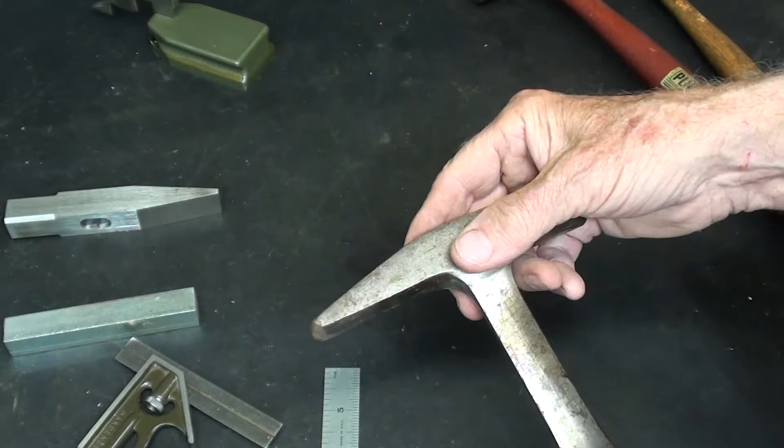I'm getting the drawing. Well, these are the only examples that I have to show you, but here we have a Stanley. Sometimes it's called a cross-peen hammer, sometimes a machinist hammer, sometimes a riveting hammer. Here's a similar one, a Plumb. Never been used. And here's an Estwing, but this is a sheet metal setting hammer. And I've talked about that before, for setting a wired edge or something of that nature.

Alright, this is a General Metals book by John L. Feirer, and he wrote many industrial arts books, metals and woods. But in here there is a blueprint for, and he calls it a riveting hammer. Well, I've given John the credit for this, and I don't think this is breaking a copyright law. But notice that this is made from 5/8 stock. Now I want to make it out of 3/4, which is what we use at the high school.

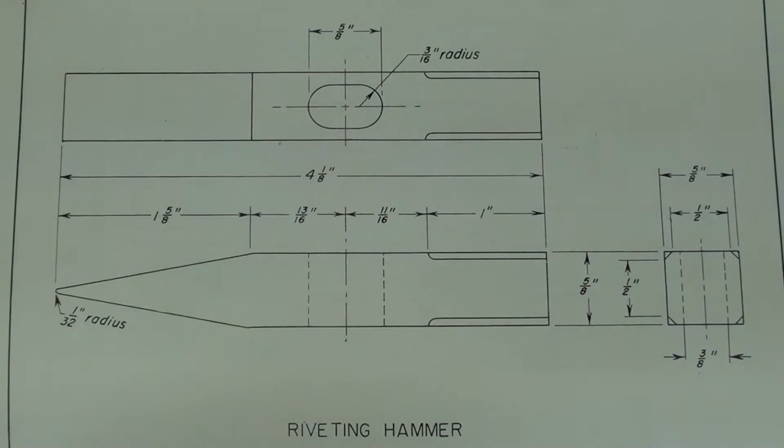So in order to do this, now this is totally against the rules and the law, but I put it in the Xerox machine, which is actually a copying machine, and by trial and error I figured out that it has to be 123% of this size in order to equal a 3/4 inch. So that's done. And this is the picture after I butchered it and changed or added a few dimensions, correcting them to what would apply to the 3/4 inch.

And I'm not going to show all of this layout. Maybe I'll go through it real fast and put it at the end, because the purpose of this video is not to show you how to do a layout, but how to use the shaper.

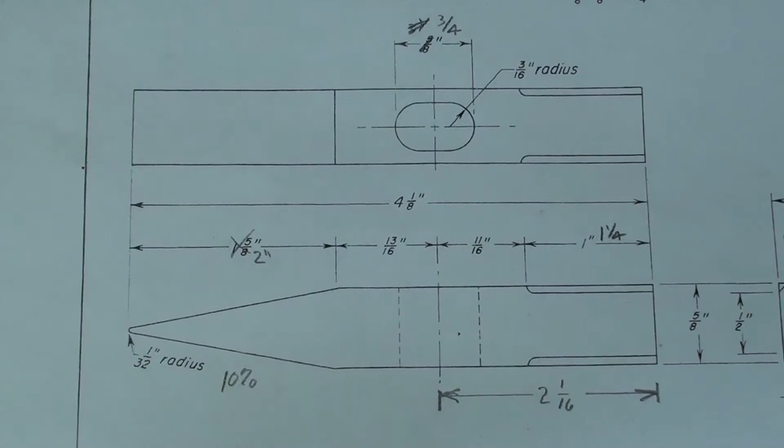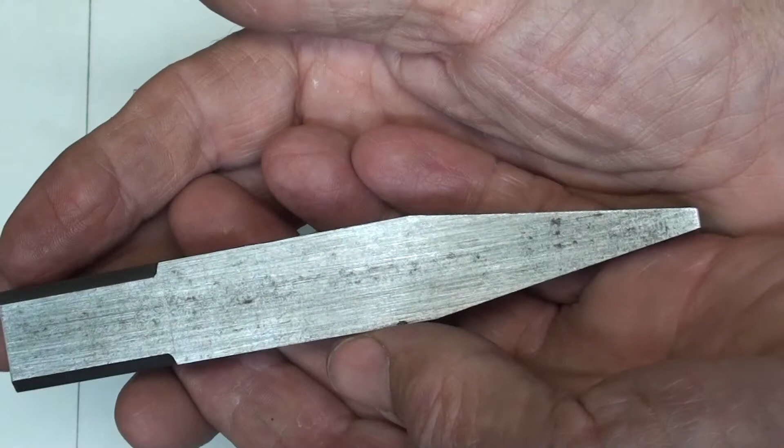But notice on the finished sample that I made, we got some beveled corners or chamfered corners. We've got a slot. Now that I will do on the milling machine. Matter of fact, all of this could be done on the vertical mill in 10% of the time, and then tapering this off. So that's a shaper project, and this is a shaper project. I should get that out of the way. And the contrast is different, but that's what it looks like.

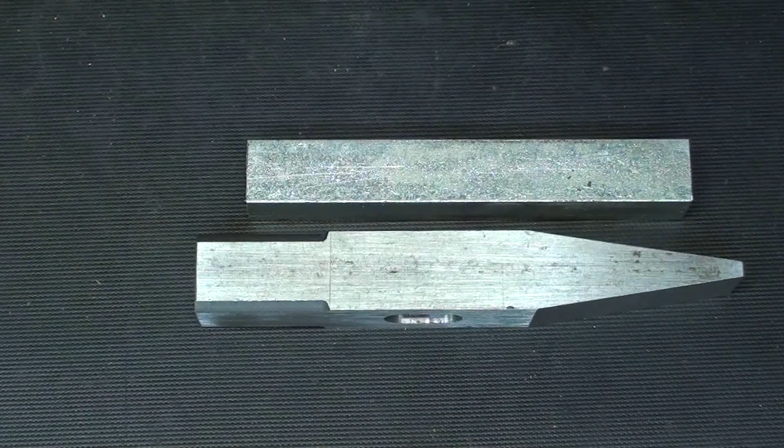So I've already been through this once in my, shall I call it, rehearsal. Let me also say that in my machine shop class we made this out of tool steel, and then we hardened it and we surface ground it, etc., and took it to a totally different level than what I'm going to do here. This is cold finished steel. This is actually a useless project, but many shop projects are meant to learn certain operations. We don't really care about the end product. I'll throw this away.

Alrighty, the layout is done, and that's shown, as I told you, at the end of the video if you want to see it. And it's ready to go, and the first thing I will do is to mill, or should I say shape, these bevels up to that line. So that's 4 setups and 4 cuts. And I will cut that all in one pass. Not too concerned about the surface finish.

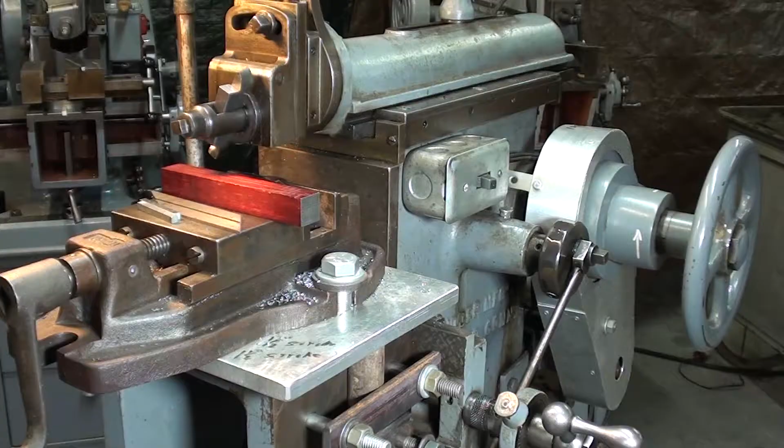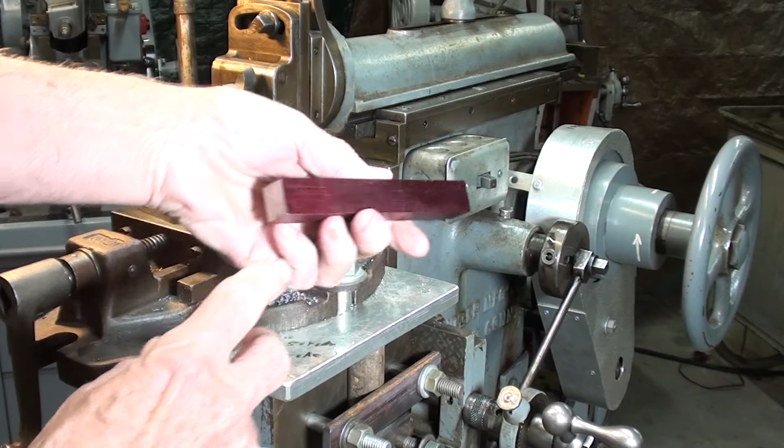Okay, I'm in the shop with the Rowe shaper, and let's talk about the setup. Now some of this I have done ahead of time because you have seen me do it or talk about it in previous videos. For instance, I have already set the stroke length so that it's really only about a 1/2 inch stroke, maybe a little more. And the speed, I'm not sure how many strokes per minute, but it is the maximum. And I have set the strokes so that it will be located right across the bevels. So let's talk about how to set this up in the vise.

Well, this is how I want to set it up. This, of course, is the finished one. That's the new one that I'm actually going to machine. I just have it in here so you can see what I'm doing. Notice that it's on a parallel. Now, I looked and looked through all of my drawers, and I thought that I could hold this with a V-block of some type so that it is held at a 45-degree angle in this position. But I could not find one, so here's what I came up with in the way of a setup. Let me take this out.

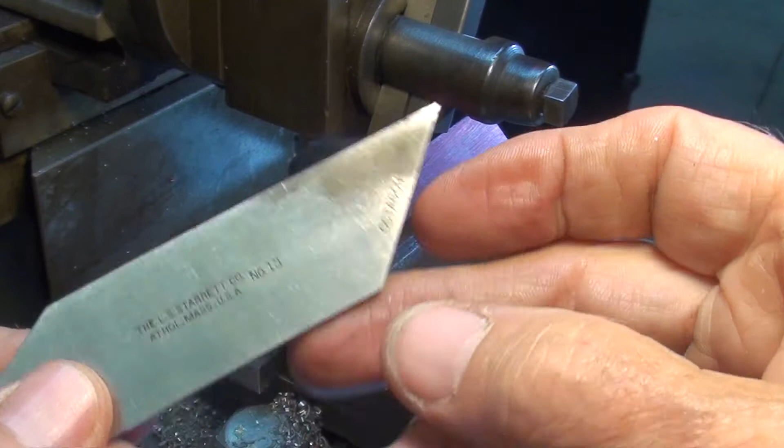There are probably all kinds of ways of doing this, but this is a Starrett square blade, and it says hexagon on one side and octagon on the other side. But anyway, the octagon side is 45 degrees, so that's how I'm going to make sure that I have it in there at a true 45, not like this or not like that.

So the whole idea here, if I can get that parallel under there, and the vise is just barely snugged, and I'm using a couple of parallels here, which really are just pieces of key stock that bring it up to the right height. And I will check here to see that is 45 degrees, and possibly loosen the vise just a little bit to bring it into compliance, and then tighten it down. And I will have to do that 4 times because I'm going to make 4 bevels, 1 on each corner, up to that line. Clear as mud at all?

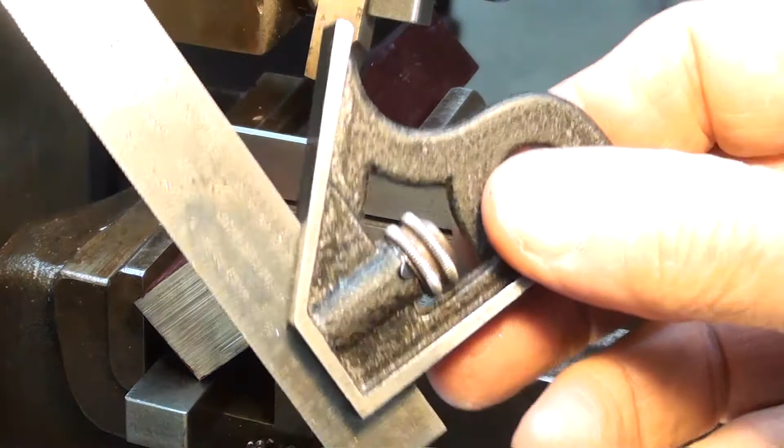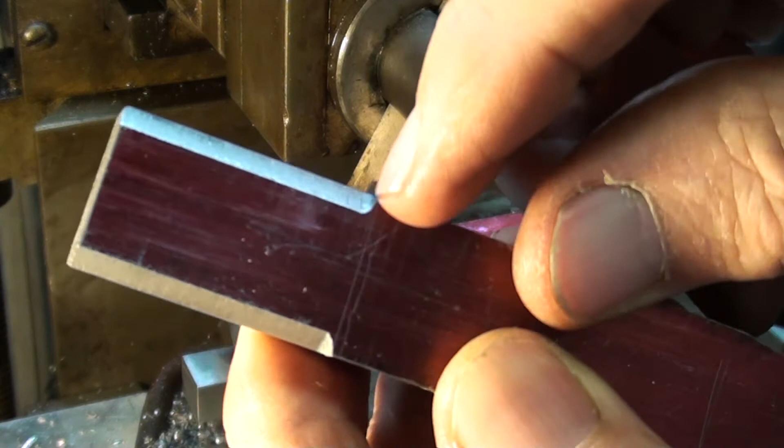Now, I suppose you can use a little square head or something similar to make the setup. Use your originality and creativity. Next, let's take a look at the tool. Now, I set that tool, which I've been using, it's a round nose, nothing special. But at the angle that I've got that set at, and I don't know what it is, it's going to give me pretty much the final angle here, and it doesn't matter what it is. I think that's a pretty good looking angle.

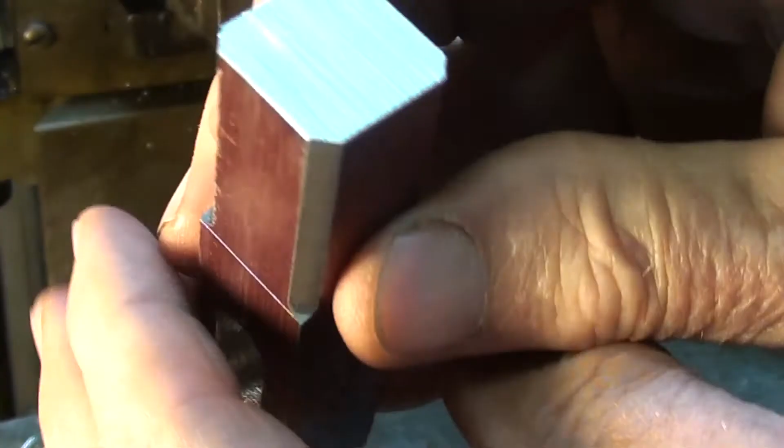Now, I want to set the depth, because this flat should be about 1/8 inch wide, but it doesn't really matter because it's just for appearance. But we want all 4 to look exactly alike. So I'm going to touch off, and I have already determined that it will be about 70 thousandths deep to give me that width. Make any sense?

I am often using the hand wheel here to move the machine back and forth, the tool back and forth. You won't see my hand doing that, but certainly do not turn the machine on until you are sure that it will not crash or damage the machine or the work or anything like that, and make sure the work is tight and cannot move. I've already done that. I'm feeding the tool down as I move the tool back and forth until I just touch. Putting a piece of paper in there wouldn't be that useful. Okay, I am touching.

Now I'll move the tool out of the way. I'm cranking the cross rail crank so that if I turn it on now, nothing will happen. I have zeroed out the collar up here, the graduated collar, and I'm going to feed down 70 thousandths. Actually, I'm on 10, so I'm going to crank in to 80. All right, that means I have moved it down 70 thousandths.

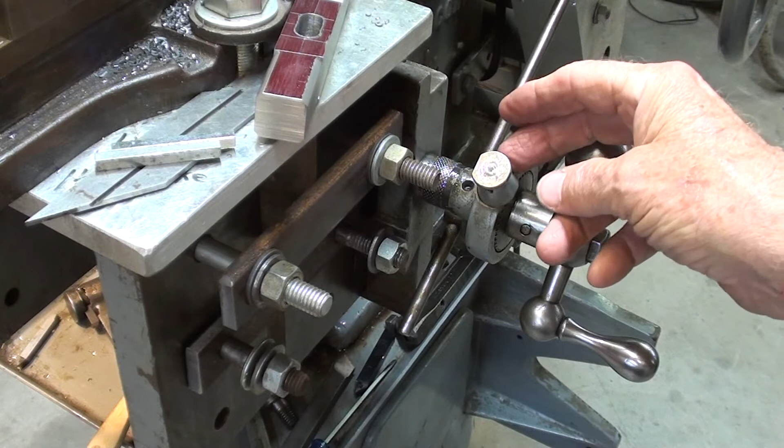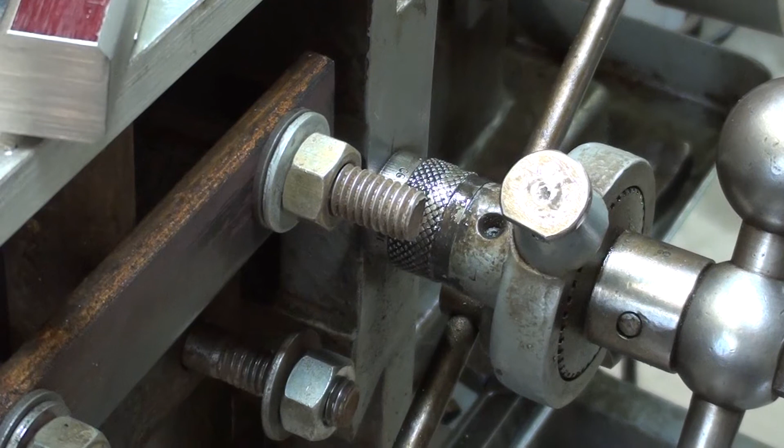Once the tool is engaged and starting to cut, I'll be cranking in here, then I will put it on automatic feed with the flat spot down like that, and that will be a feed of about 4 or 5 thousandths per stroke. This machine is kind of noisy. I'm not sure you're going to be able to hear me as I feed, and the cutting tool comes down to the layout line here, that's when I will disengage the feed, turn the machine off, back it up, and rotate the work, and I'll be doing that 4 times. Let's turn it on and see what it looks like.

And you can see that I came right up to the line, and that gives me a nice termination there, that angle. All right, now I will take it out, rotate it 90 degrees, and do it again. And that didn't take very long. The finish is just okay. It's not great, but it's good enough.

I know I didn't use oil, but let me mention something about safety. Make sure you got your glasses on, and do not stick your finger or any other tool in there to remove chips. Be sure and use a brush. You can't miss with the brush. And you can sacrifice the brush if it gets caught. But don't get your fingers in there. And again, let me repeat, turn the machine over by hand with a hand wheel to make sure that it will not crash.

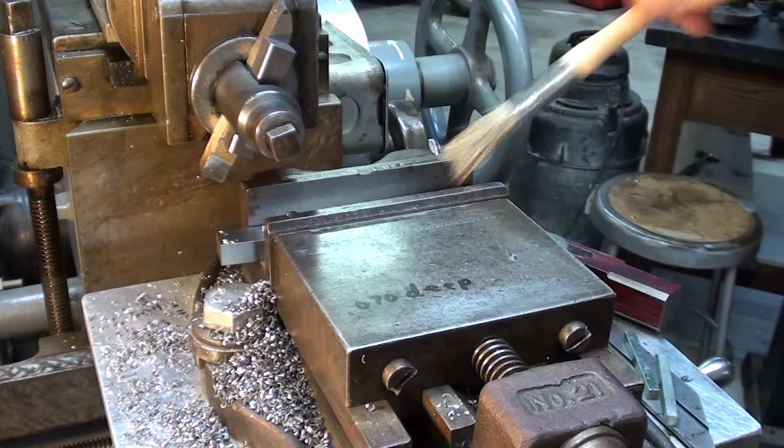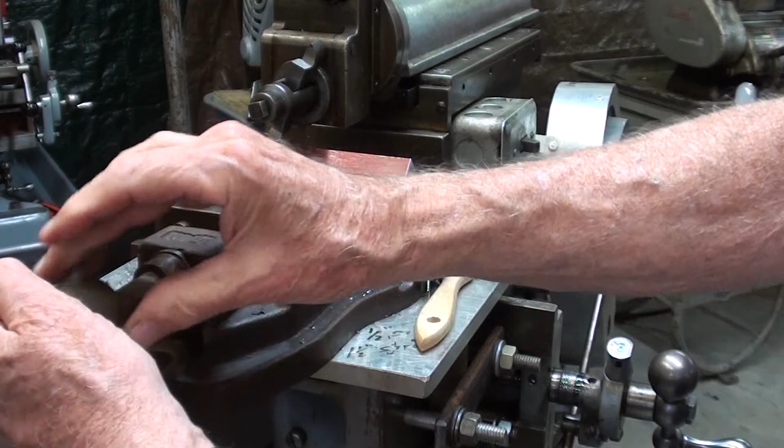And the setup will be done the same each time using this 45-degree blade. I'm certainly not going to show that every time. Okay, this is the second corner. Okay, that was side 4. Looks pretty good and uniform.

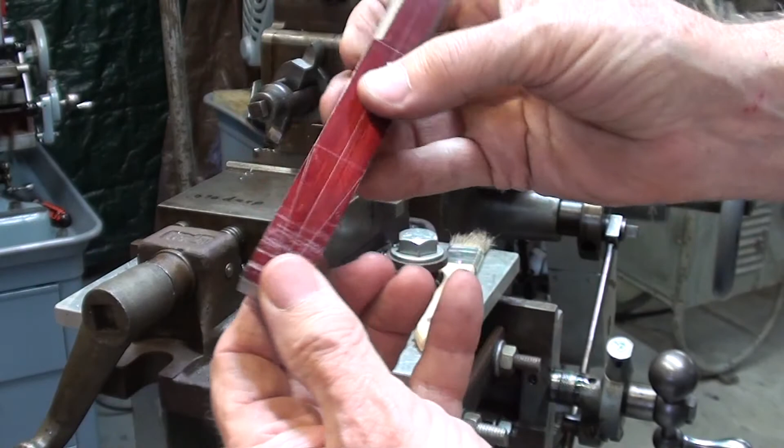And now on to the tapered end. I've already changed the length of the stroke to about 1.25 inches or so off camera. And now the position of the stroke is not quite right, so I want to move it back a little bit this way. Just a little bit. That's perfect. Now I'm going to change tools.

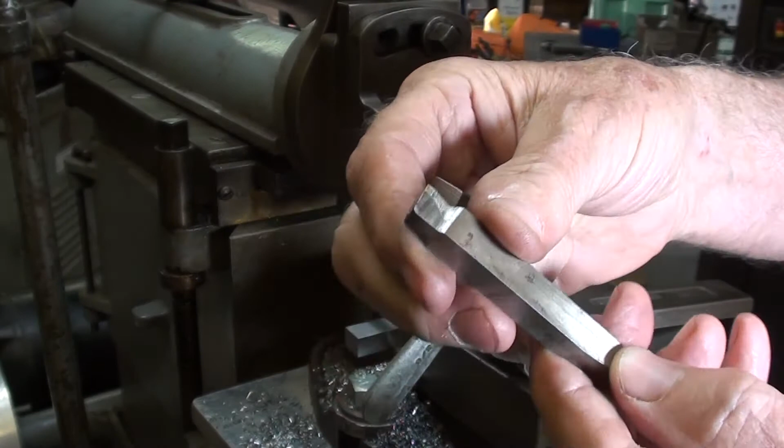So I'll take this one out. And that's what it looked like. And I'm going to put this one in. But I have to raise, or I should say lower the whole table a little bit.

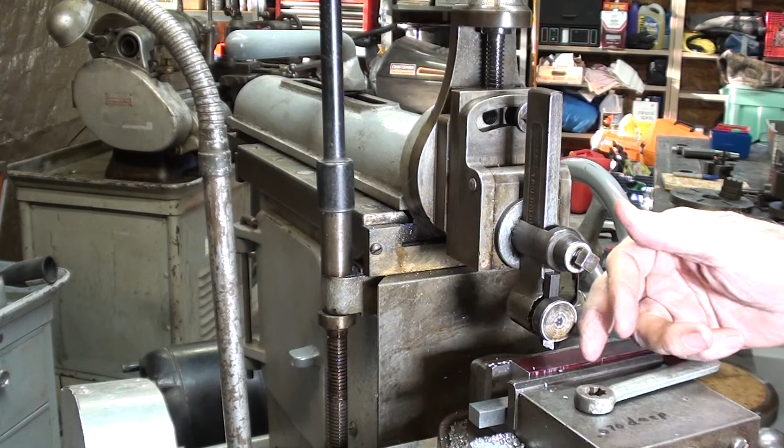Well, now that I've changed the tool holder, I will have to change the position of the stroke again. That's right. You want the tool to come a little bit past the work on the backward stroke as well as on the forward stroke. That gives the clapper box time to drop down and get in position.